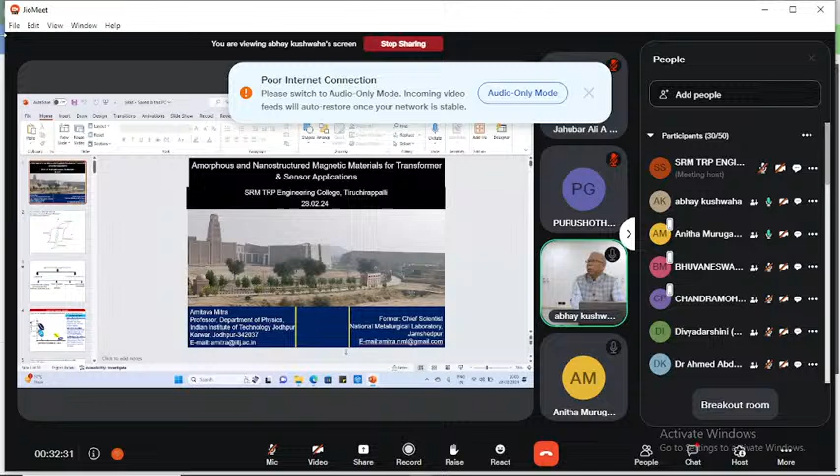Good morning to all gathered here. Good morning, sir. Sir, the slide is visible now. Can you go to full screen mode, sir? Yes, it is moving, sir. Anitha ma'am, shall we start now? Is it moving? Yes, sir, it is moving. Okay, thank you. Sir, shall we start now?

I'm ready, sir. Who won the Nobel Prize of Physics?

It was on this day in 1928 that his discovery of the Raman effect came to light at the Indian Association, to raise awareness about the importance of scientific applications in our daily lives. The theme of this year, 2024, is Indigenous Technologies for Viksit Bharat. Today, February 28, 2024, we have all gathered here to celebrate National Science Day with a small seminar with our special renowned personality, Dr.

Amitava Mitra, Professor, Department of Physics, Head, Center of R&D, Scientific Instruments, Jodhpur. Dr. Amitava Mitra completed his MSc in Physics at University of Calcutta in 1981 in the field of disordered materials. After carrying out his PhD at the Institute of Applied Magnetism with a Spanish Government Fellowship, Dr. Mitra joined CSIR, National Metallurgical Laboratory, Jamshedpur, India, in the year 1990, and developed the NDE and Magnetic Materials Group. He became Chief Scientist in 2010, and Professor of the Academy of Scientific and Innovative Research, CSIR NML. He has guided 6 PhDs and 7 MTech students for their thesis. He superannuated from CSIR NML in 2019 as Head of Research Planning and Business Development Division, and won the Best Metallurgist Award in 2006 from the Ministry of Steel, Government of India.

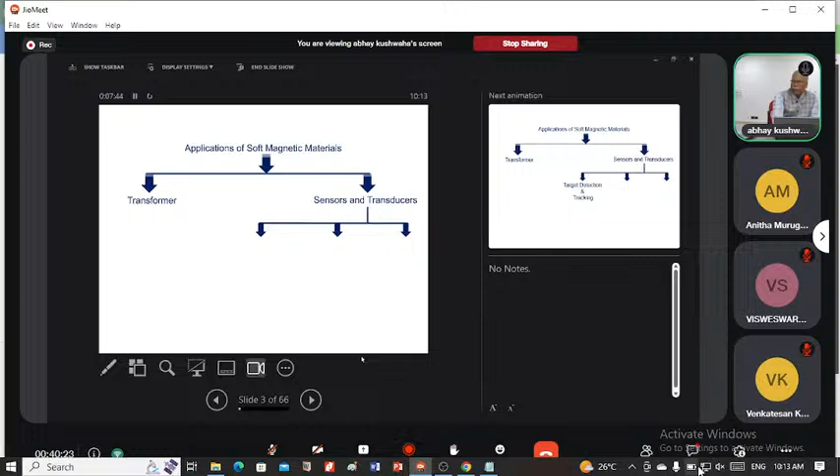What are the applications of soft magnetic materials? There are two major applications: one is transformers, and the other is sensors and transducers. Sensors and transducers also have different applications - it can be used for target detection and tracking, space research, and biomedical applications.

We work at National Metallurgical Laboratory mostly in another area, that is characterization of aging steel, instead of completely discarding a plant and going for a new one. This is a very good area of work. But one problem with this area, as we concentrate on magnetic properties, is that it is only useful for components which are steel structures. But if you see, most heavy structure is made of steel, so that is an advantage.

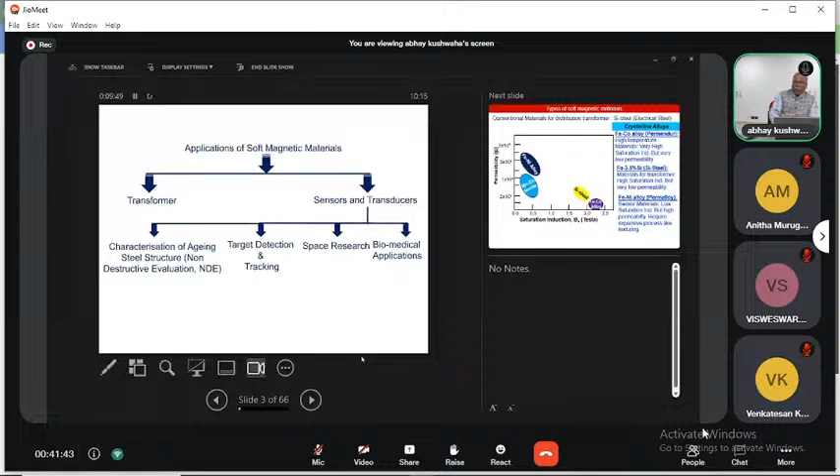Now, we will first concentrate on transformer materials, and then, if time permits, I will give an example of the material developed at the National Metallurgical Laboratory and how it can be used for pipeline inspections. As the theme of the entire proceedings is on indigenous materials, the total work we will describe is the indigenous development of materials - not only the materials, but the applications are also done indigenously.

If you consider the soft magnetic materials, these are the basic materials: iron nickel alloy, sometimes called permalloy. Another category is iron cobalt alloys, and also ferrite, manganese zinc ferrite. These are all soft magnetic materials.

These are the very conventional materials. Iron nickel alloys, called permalloy, is at the top. It has very high permeability and is used mostly in sensor elements. Iron cobalt alloys have very high saturation magnetization and are used where we require very high temperature materials, because the operating temperature is very high. Its commercial name is Permendur.

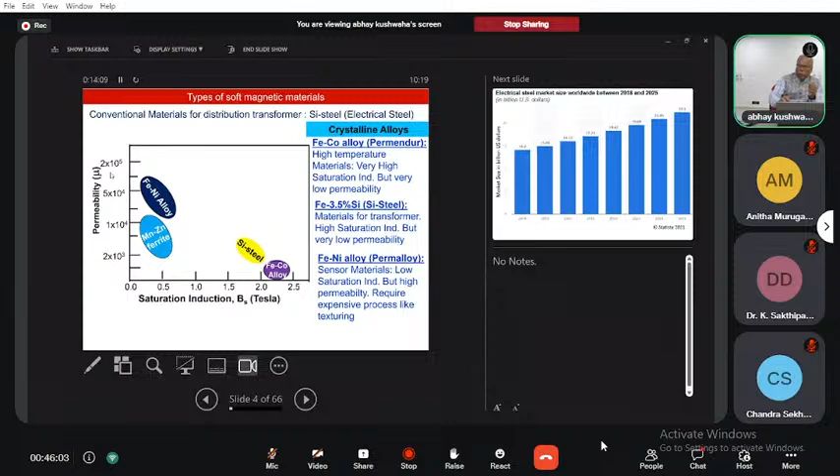Now, this silicon steel is also called electrical steel, because its major application is in transformers, where we are transferring electrical energy from one end to another. That is why it is called silicon steel and also electrical steel.

This is showing how the market of electrical steel worldwide is increasing day by day. This graph shows data from 2018 to 2025, and it basically shows how in demand these materials are.

And in fact, if we consider soft magnetic materials in total, more than 50% of this material is used for transformer cores. So the major market of soft magnetic material is as a transformer core.

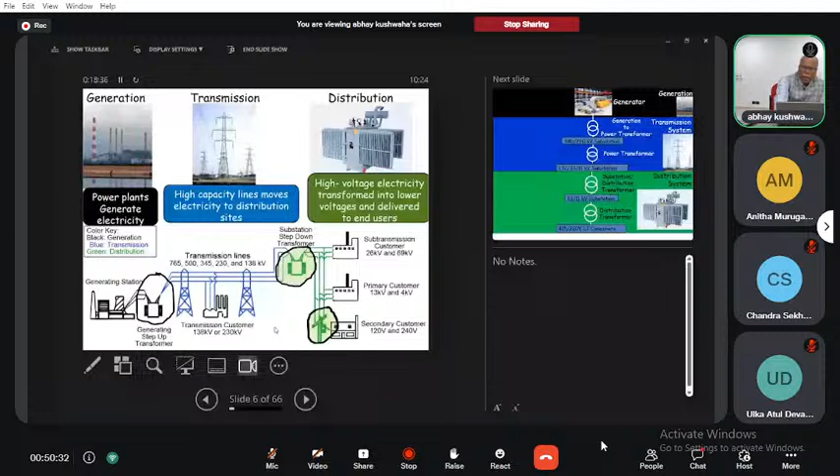And if you see this transformation process, if you prepare 100 units at the generating station, only 65 units are available for our consumption. Where do these losses take place? There is about 5% transmission loss. So when the substation receives the 95 units, many people are tapping into this line.

So the government is not getting the right type of revenue from this. But this 15 to 20%, which is the technical loss, is an opportunity for the materials scientist: how we can reduce that 15 to 20% technical loss.

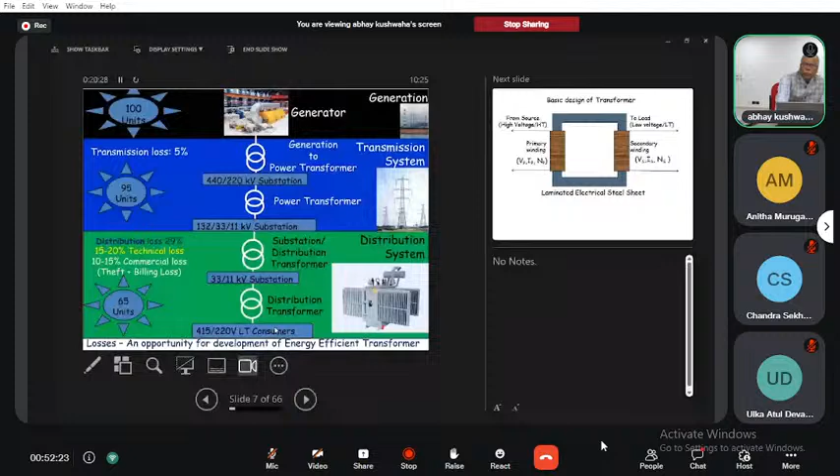This loss is basically an opportunity to develop the energy efficient transformer. If we can develop better and better materials, we can reduce this 29% losses. Now, if you see a basic design of the transformer, these rectangular portions are made of soft magnetic materials, and on the left side we have the primary coils, and on the right side the secondary coil.

The high voltage transformer, which is coming from the generating station or from the substation, goes to the household supply through the secondary windings. At the secondary windings, we put the load. When the load is connected, current flows to the secondary. When the load is not connected, nothing comes in the secondary. But at the primary end, there is always current flowing in the circuit.

So we can determine what loss is taking place. This loss is a load loss and also a no load loss.

Think about charging our mobile phone with a charger. At home, we never switch it off at the source, we just take the mobile out after charging. So our switch is on, but there is no load. At the secondary windings, no current is flowing, but in the primary winding, current continuously flows. But if we put off the switch, current will not flow in the primary windings either. So we can understand there is a load loss and a no load loss.

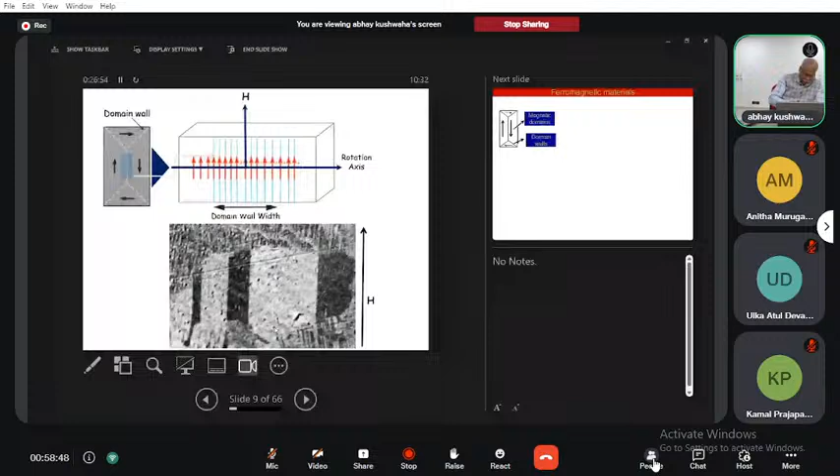The domain wall moves from one position to another, and when it reaches saturation, all the moments are oriented in one particular direction.

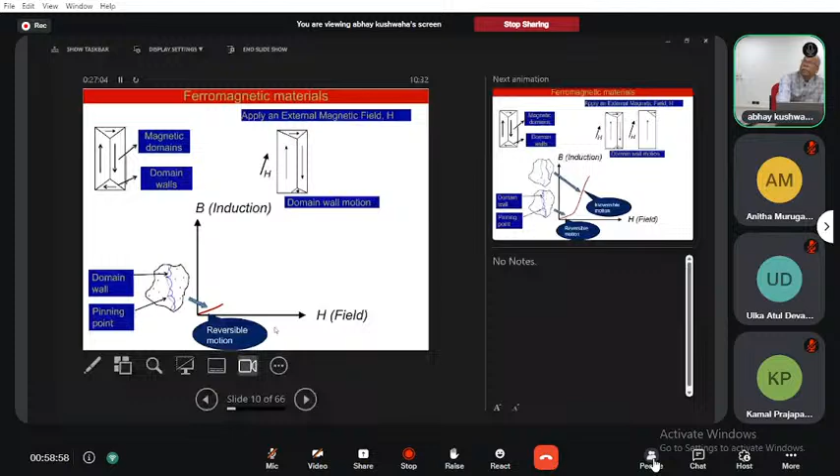If we plot magnetic field versus induction, at the initial stage we have reversible motion of the domain, then irreversible motion, then domain rotation, and we get saturation. If we go for the complete cycle, this area is called the anisotropy energy of the material.

If we go for a complete cycle, we get a hysteresis loop, and the total area under the curve is called the core loss. Our attempt should be to keep this core loss as low as possible, and also to reduce the eddy current losses.

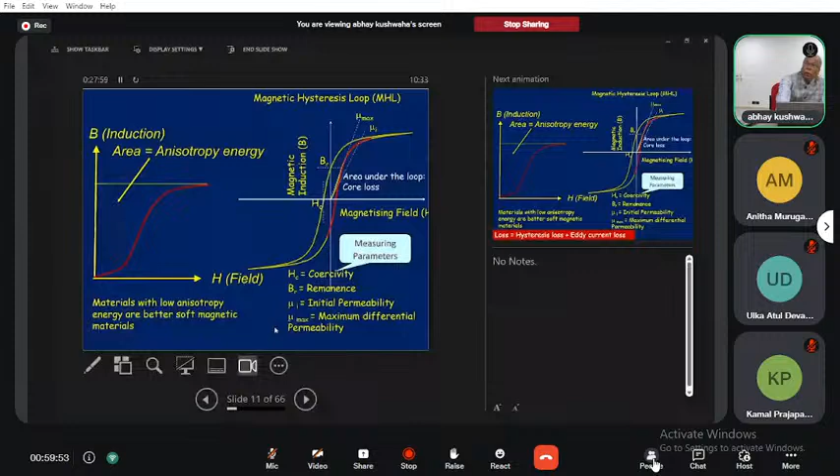So as mentioned, the losses are hysteresis loss and eddy current loss. If we consider silicon steel and go on increasing the silicon content, the total loss reduces as we increase silicon, and it becomes minimum when it is about 6.5%.

Now if we look at the resistivity measurements - why is resistivity important? Because if the material has high resistance, then the eddy current loss will be less, since the loss here is I squared R.

So if the resistance is high, then the current I will also be less. This matters because the loss varies with the square of the current magnitude, so if I is less, then the eddy current loss is also less.

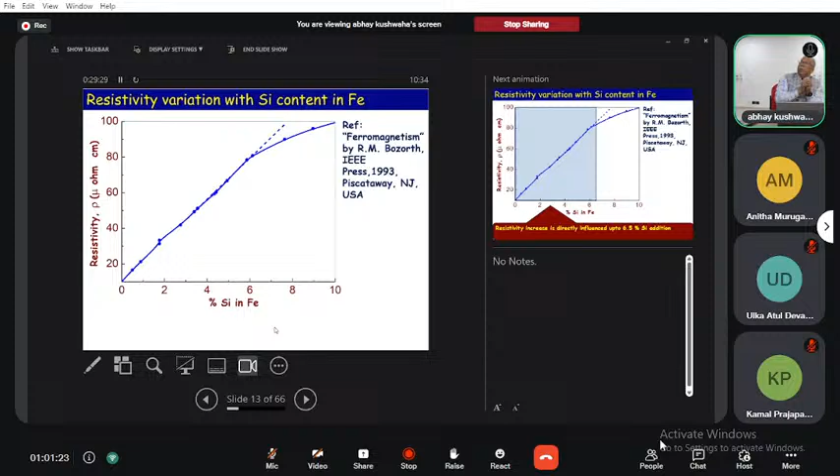But you can see it increases linearly up to around 6 to 6.5%, and after that it deviates from linearity. So you can understand that 6.5% silicon steel is a better material because its losses are less, and also the resistance is high.

When we process this material, as mentioned, the processing is the same way we prepare steel - it has to be melted, cast, and then rolled. Rolling involves two big rollers, just like sugarcane juice is prepared when the cane is pushed through two rollers. Here also, the steel in its hot condition is passed through two rollers to reduce its thickness.

So pass by pass, we reduce the thickness. But this is only possible if the material is not brittle. Let us see how this changes with silicon content.

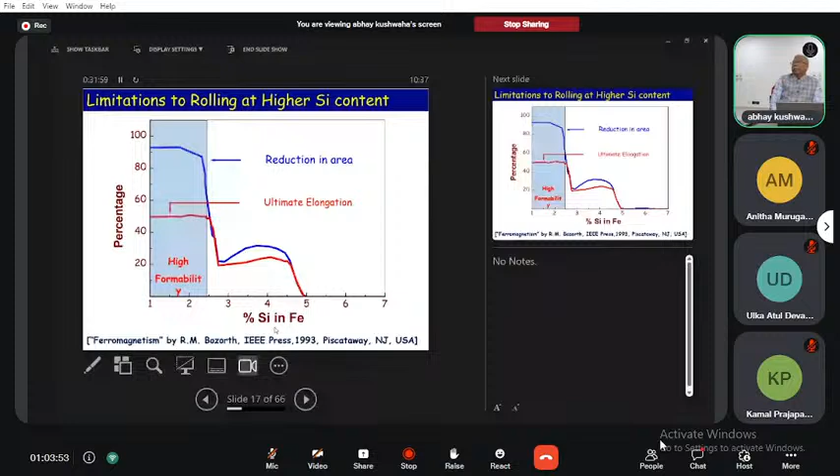If we go on increasing the silicon, we find that after 5%, it is very difficult to proceed, because the material becomes very brittle. This area cannot be rolled when silicon is greater than 5%.

So we have a small window - although 6.5% gives better magnetic properties, we cannot achieve it because of the formability problem. We cannot reduce it into thin sheets, and if we cannot make thin sheets, we cannot put it in laminated form. If we cannot put it in laminated form, eddy current will be very high, and handling also becomes very difficult. So we have a very small window to work with for these materials.

Now, another thing observed is related to grain size. If we plot grain size against the coercivity of this material, we see that for higher and higher grain size, the coercivity becomes as low as possible. There is a region called the single domain size, where coercivity is as high as possible.

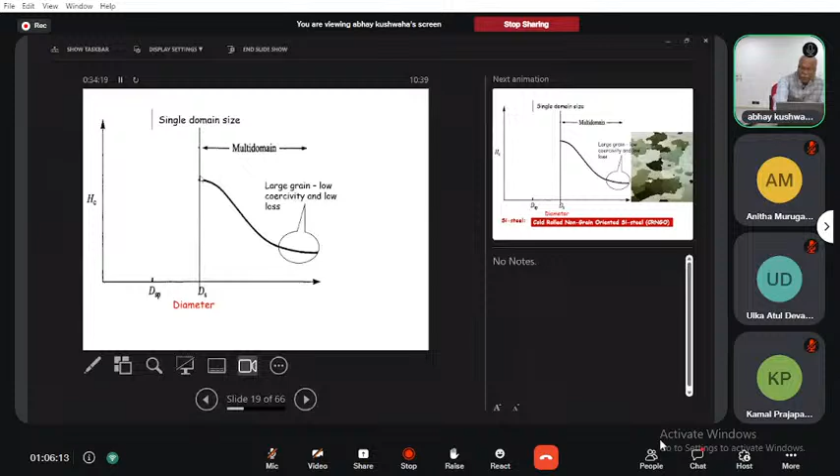So we have now a large domain size, a large grain, low coercivity, and low losses. And if we see this silicon steel, if we go for around 3.5% silicon, we can get a grain size which is quite high. This is called cold rolled non-grain oriented silicon steel.

So now we come to silicon steel with 3.5% silicon, not 6.5%. We have a variety called cold rolled, non-grain oriented silicon steel, and another variety called cold roll, grain oriented, where you can see the grains are oriented along one direction. So we have two types: cold roll non-grain oriented, and cold roll grain oriented.

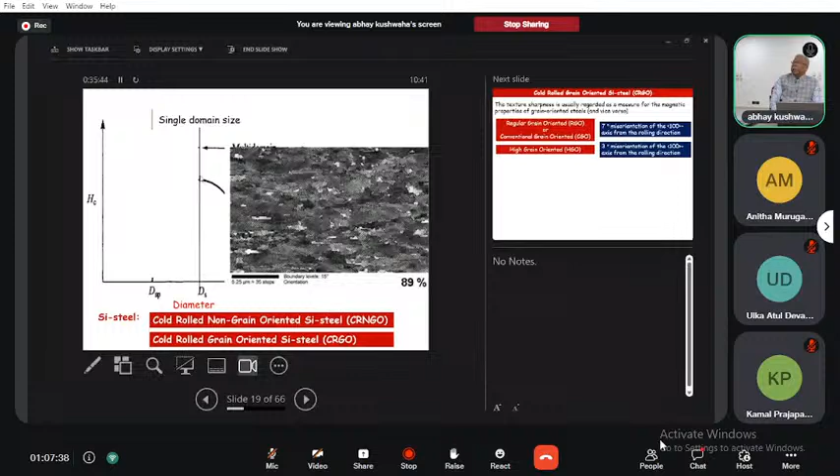In fact, in India, cold rolled grain oriented silicon steel is still not commercially produced. Some effort is going on at Jindal Steel to prepare this CRGO. But CRNGO is produced by many steel industries.

Out of CRGO, which is the better variety, there are again two types of silicon steel. One is called regular grain oriented, where the orientation and the easy axis have 7-degree misorientation, and another is high grain oriented steel, HGO, where 3-degree misorientation from the rolling direction takes place. So I am not able to orient all the field along the rolling direction or along the easy axis.

So if we consider the losses for regular grain oriented and high grain oriented steel: for regular grain oriented this loss is about 0.6 watts per kg, and for HGO it comes down close to 0.55 watts per kg. You can see the various varieties of materials and various types of losses: hysteresis loss, classical eddy current loss, and excess eddy current loss.

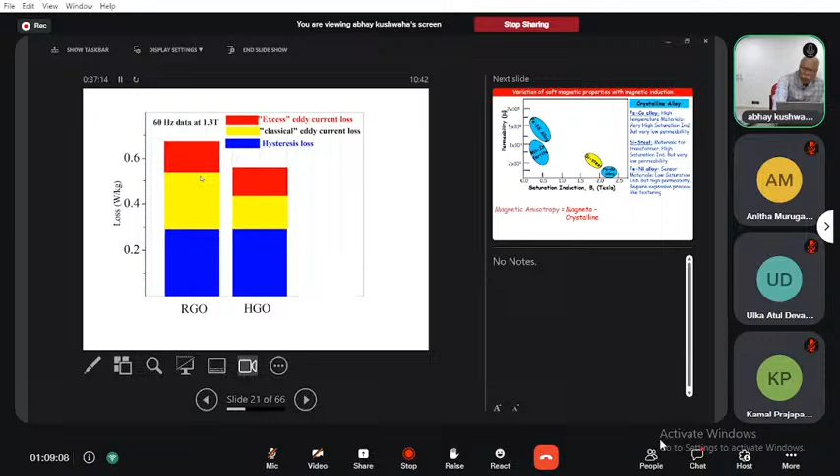Now if we consider the magnetic anisotropy of this material, as these are basically crystalline, polycrystalline materials, the major anisotropy comes from magnetocrystalline origin because of the crystal orientations. We have another called magnetoelastic anisotropy, which comes because of the magnetostriction constant of the material, and another type of anisotropy.

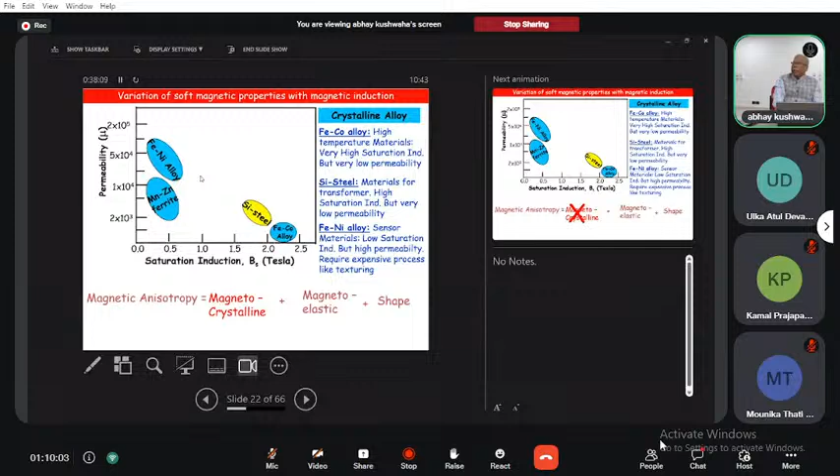If we consider the major anisotropy coming from magnetocrystalline anisotropy, and if we can eliminate it, then I can reduce the anisotropy energy of the material drastically. And as the anisotropy reduces drastically, I can also reduce the hysteresis loss drastically. So our effort will be how we can reduce this magnetocrystalline anisotropy, which arises because of the crystal structure.

Now, how does the crystal structure come about? If we melt a material and give sufficient time during cooling so that an equilibrium structure forms, crystalline structure is a very equilibrium structure, and we get a crystalline structure.

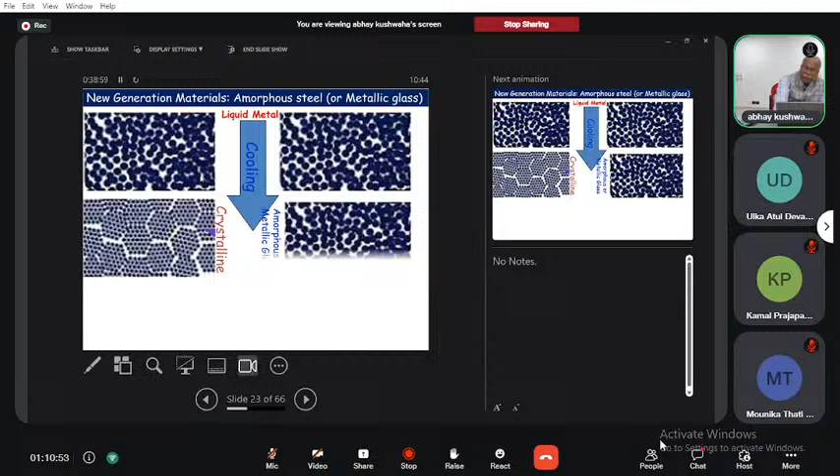But instead of giving sufficient time, if we quench the material from the liquid state to the solid state while retaining the liquid structure as it is, then I can eliminate the magnetocrystalline anisotropy of that material. This is the basic philosophy behind going for amorphous material. We go for amorphous material, amorphous steel, or metallic glass, whatever you call it, because it has a glassy structure and does not have any crystalline anisotropy.

So how can we do it? We can do it by rapid solidification. What is the process of rapid solidification? You have a copper wheel, and you rotate this copper wheel, and the liquid metal is poured onto it. We get the material as a form of strip, a very thin strip, around 30 microns thick, in the form of a thin ribbon. This facility has the capacity to produce 1 kilogram of material, and it was developed at the National Metallurgical Laboratory for development of these things.

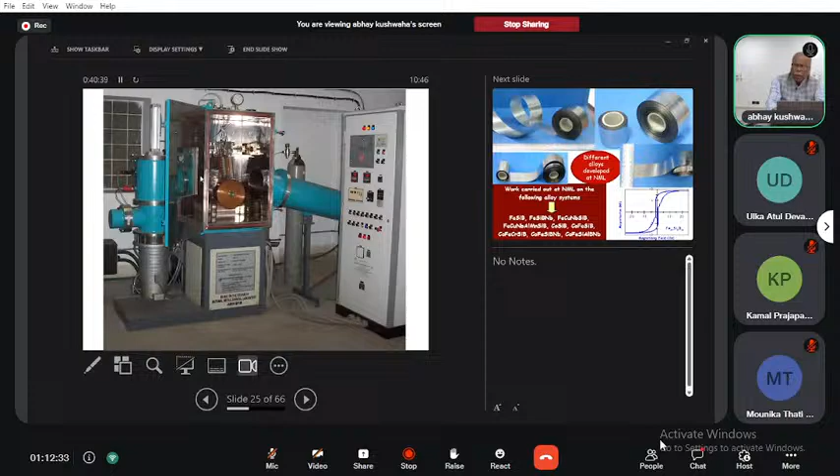Let us see whether I can show you a video where you can understand what process is taking place. Just let me see whether I can get it, because there is a problem. Let us see whether I can show you how to go. Just give me a moment. Share. Share screen. Entire screen.

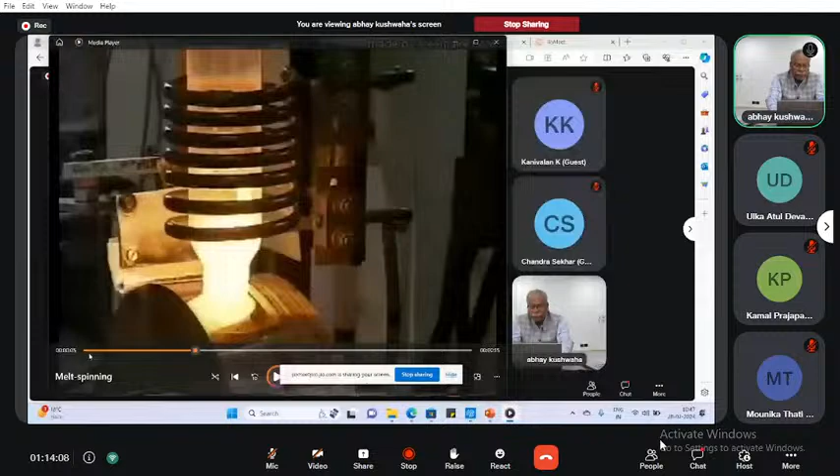Are you able to see that video? No. Are you able to see it? Yes, sir. Yes.

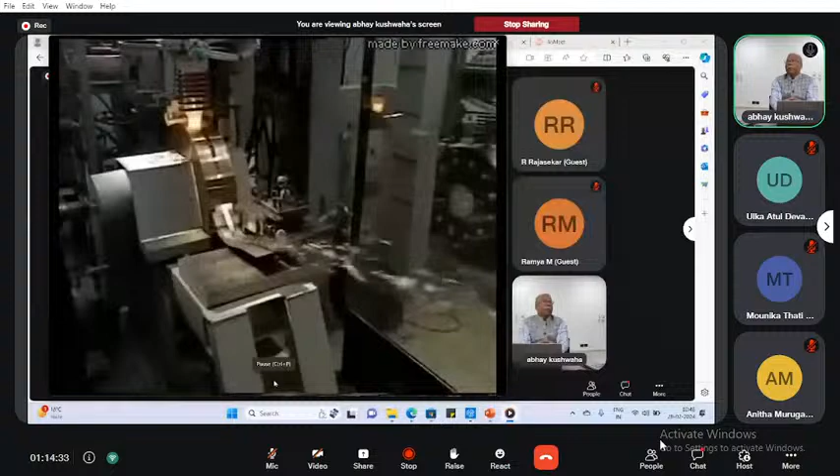You see, this liquid metal is now pouring on that wheel, and we are getting a continuous ribbon. Let me just do it once more. So you can have that ribbon in that form.

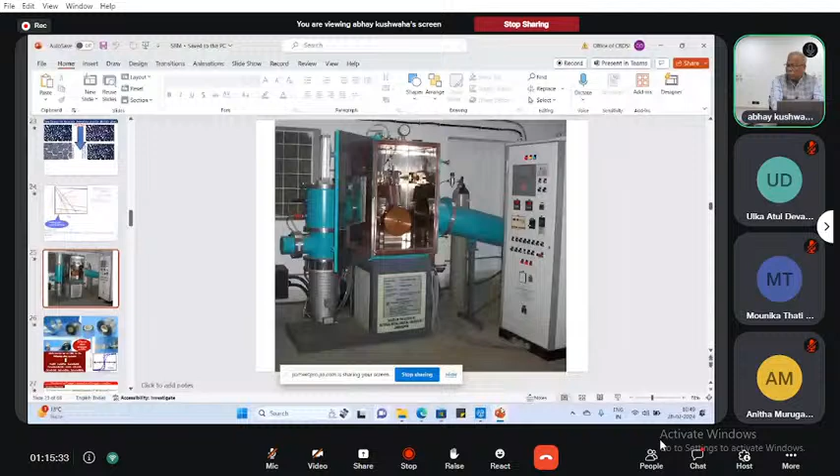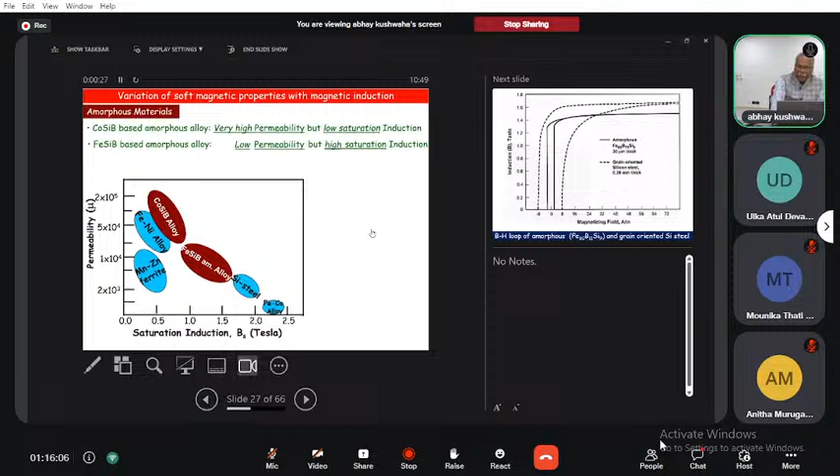Iron, silicon, boron - these are the type of materials. Now if we compare this material with the hysteresis loop of silicon steel, you can easily see that amorphous iron, boron, and silicon has a very narrow loop as compared to the grain-oriented silicon steel. So there is a huge reduction in the hysteresis loss, and at the same time, because of the amorphous structure, the resistivity of this material is quite high as compared to the crystalline structures.

Now if we compare this material to the regular grain-oriented and highly grain-oriented steel, with the amorphous alloy or metallic glass, the loss for highly grain-oriented steel, which comes around 0.55 watts per kg, is reduced to less than 0.2 watts per kg. You can understand how much reduction there is in the hysteresis loss, and in the eddy current loss, both excess and classical eddy current loss.

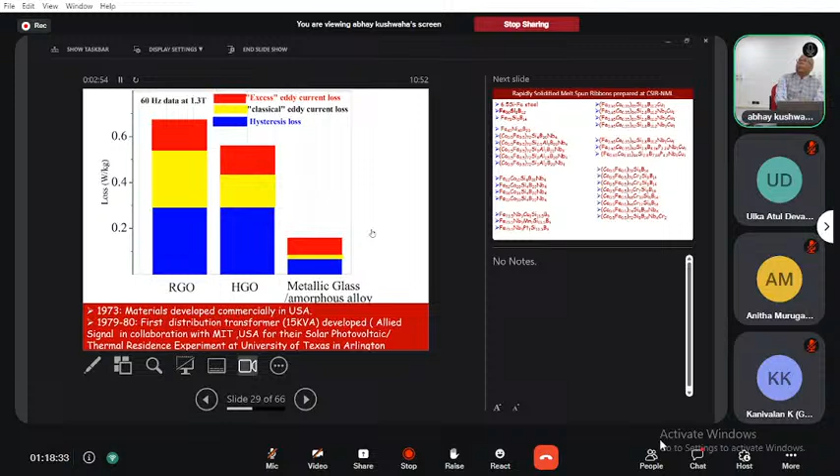And there is a large number of alloys which were developed at the National Metallurgical Laboratory. And you see, these are the various transformers.

Basically, industries have already developed in India who are producing this material commercially. In fact, just at Haryana, there was a company coming up called Advanced Materials - its name is probably Advanced Magnetic Materials.

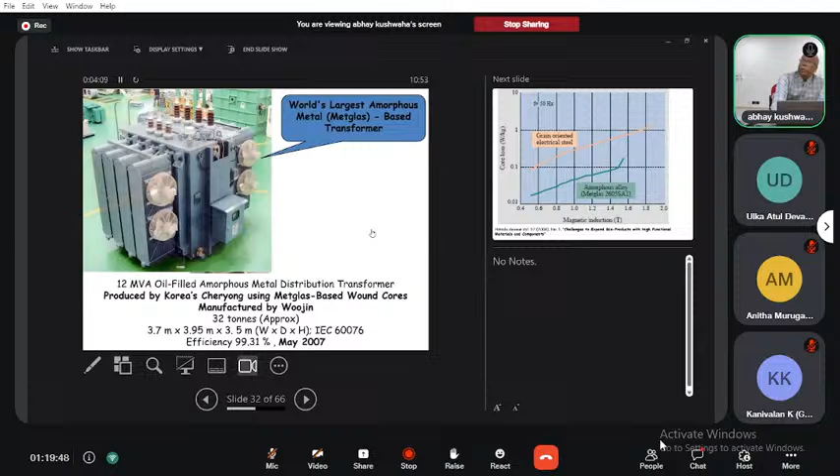They are developing their industry in consultation with the National Metallurgical Laboratories. But these are examples which were initiated at the USA, and these are the world's biggest 12 megavolt ampere oil-filled amorphous metal transformers, which were used in Korea.

But you see, all the aspects you cannot get in one material, so it has a disadvantage also. The major disadvantage is because lots of boron and silicon are present here, its saturation induction is really much less as compared to 3.5% silicon steel.

And that is why, for applications where you require a very high magnetic induction level, this material is not very good. Otherwise, you can see how much reduction there is in core loss. But as soon as it goes beyond 1.5, which is probably a useful magnetic induction level for this type of material, we can understand it will be very difficult if we want to go beyond 1.4, so this material is not advisable for such applications.

Now if we look at the applications of these materials, as a transformer material, soft magnetic materials market share for transformers is 55.9%. Next is the shielding materials, and the rest are different types of sensors and developments.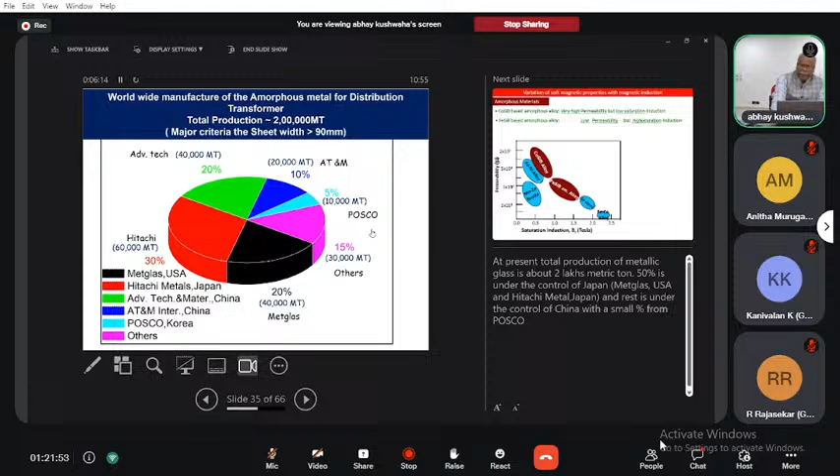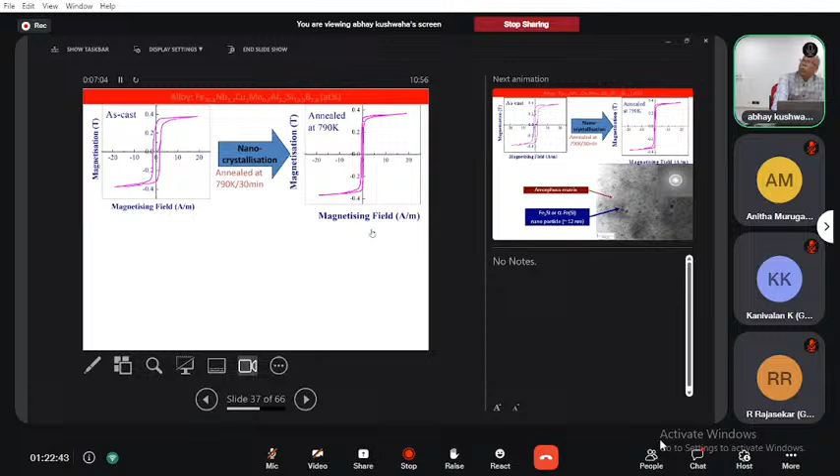If you go one more step, there is enough space available for the development of newer materials, and we are considering nanostructured materials. This is the material as-cast, and after that, if we go for proper heat treatment, we get a material called nanostructured magnetic materials, and this can be produced in large quantity - the same system that is used for producing this amorphous alloy in large quantity.

Now you add niobium and copper to it. Niobium is added so that the grain size cannot increase, and copper is added as a nucleation site, and then we can have an amorphous matrix with nanoparticles dispersed in it, and this leads to a coercivity much lower than what we got in the amorphous system.

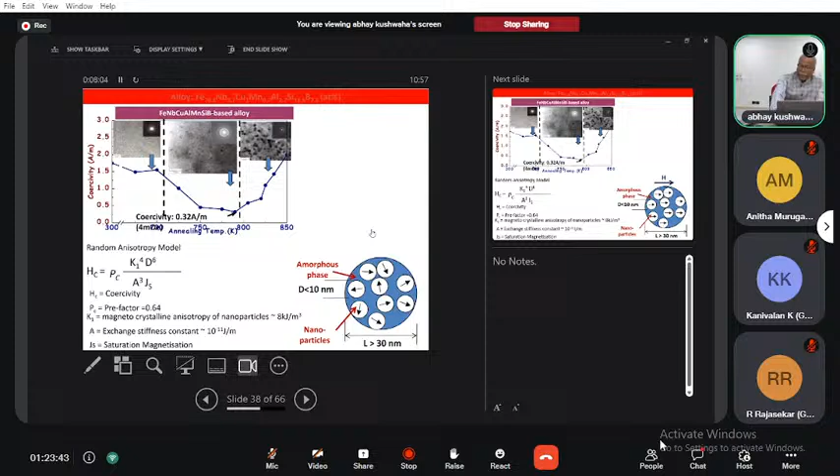Here you can see the coercivity reduces with d to the power 6. So here, within one domain wall width, you have a large number of nanoparticles, and by application of a small field you can see the domains rotate along the magnetic field. This process takes place in such a small field that coercivity becomes very low.

This is also used for development of different small transformers, and its application is in sensors, different types of sensors, because its coercivity is extremely low. Coercivity being extremely low indicates that its permeability is extremely high.

How much time do I have? Hello? Do you have another 5 minutes, 5 to 10 minutes?

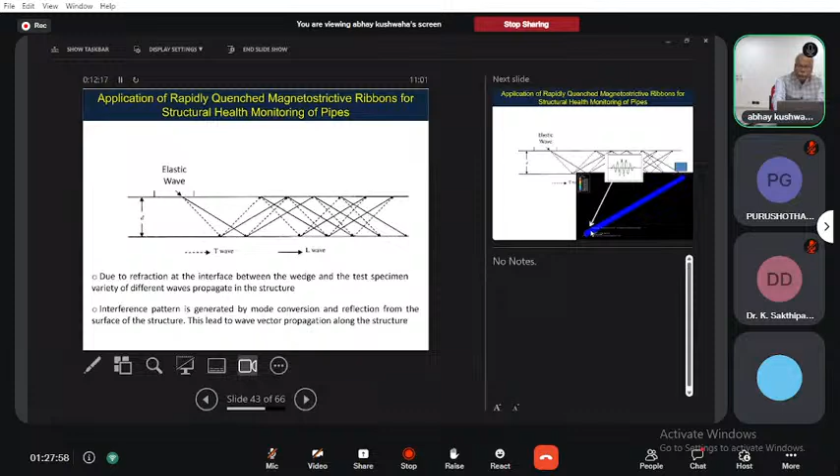So what is happening? If we make a wave at one end, this wave will move throughout this pipe and come back from the end, and again this excursion is taking place.

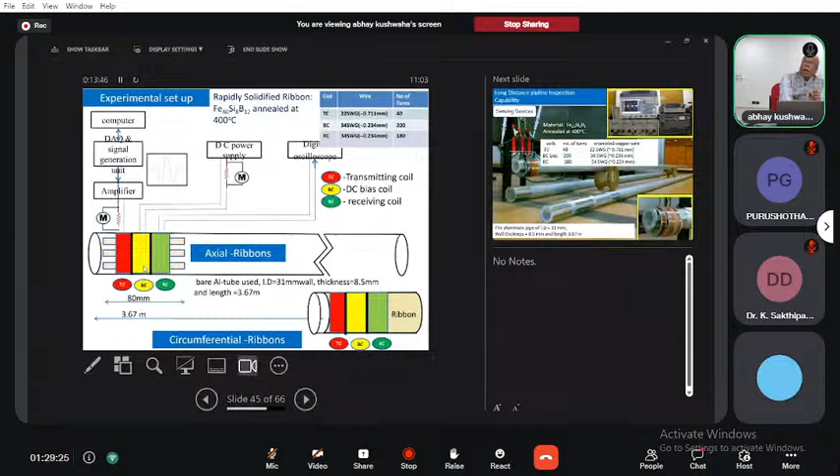This is what I call a coil. We have a coil - transmission coil, receiving coil - and also a coil which we use to produce a DC magnetic field.

This is the exact setup, and this is also equipment which was developed at the National Metallurgical Laboratory. You see, this is a type of signal which we call first back wall, second back wall, third back wall, and so on.

Now, if we have a cut here, you can find that in between the two signals, we have a signal. This is a cut, and this is where we have simulated the corrosion. So we have the signal here - one is the cut, one is the corrosion.

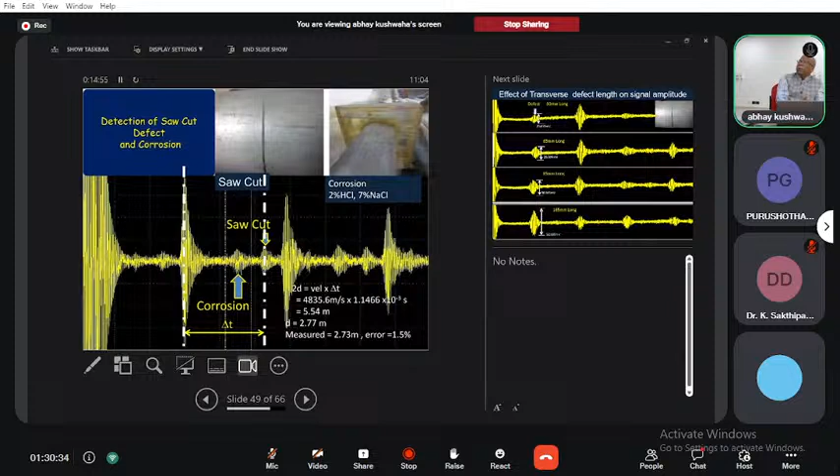So if we now know the velocity of the wave which is propagating along the tube, and from knowing the velocity and the time we are getting this signal, I can understand which location. This shows how much the signal is there.

This shows that even if the line is underground, we can also measure the signals, and if there is a hole, we also can detect the signal. So these are the applications. I am not going into any details of this other activity.

There are a lot of persons involved in this work, and I had a lot of students from NIT Trichy who did their MTech with me when I was at National Metallurgical Laboratory, along with scientists and PhD students. And this device is now commercially available in the market for use in the petrochemical industries.

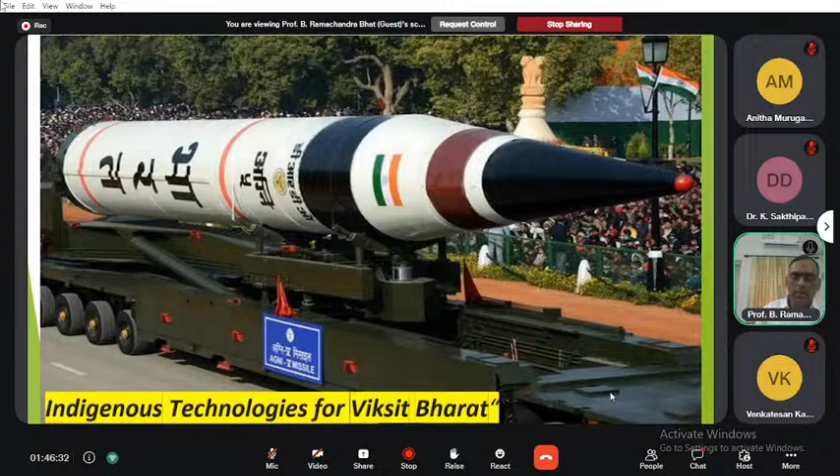This is an intercontinental ballistic missile reference, which we realized is not quite the right term, but otherwise, it's like a nano car, it is highly spacious and convenient. Now, what do you mean by nanoparticle?

Nanoparticle - this is a basic question someone might ask, and this will be the response. In general, we say that it is a particle with size in any one spatial direction within 1 to 100 nanometers. But the perfect definition is different: particles with size in any one spatial direction within 1 to 100 nanometers, with their property being markedly different from that of the bulk material. This is highly important, because when the size decreases, the property changes, and that is called nanoparticles.

You can see that all of you are physicists probably, and you know the famous tagline: 'there's plenty of room at the bottom.' In 1959, Richard P. Feynman said, 'there's plenty of room at the bottom.' That means you can go down in the size of the material, and definitely you will have a lot of physics, chemistry, or biology to explore - a whole science to explore.

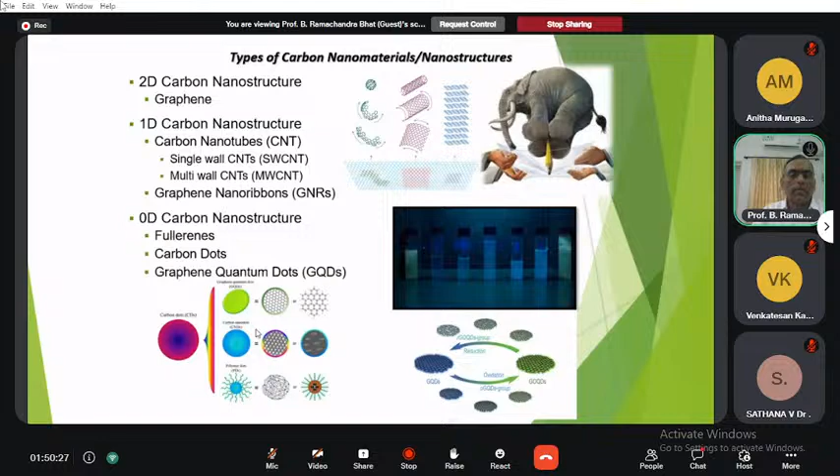Another material is the graphene quantum dot. It also comes under zero-dimensional carbon nanostructures.

So at the conference on nanotechnology, the organizer called an expert in nanotechnology, and he introduced the conference audience to the two one-dimensional carbon nanostructures, that is carbon nanotubes and nanofibers.

The carbon nanotube, CNT, is described as a seamless cylinder made by rolling one or several layers of graphite sheets into a tubular structure. So this graphite sheet rolls up to give carbon nanotubes. We have different types of carbon nanotubes: single wall carbon nanotube and multi-wall carbon nanotube.

Coming to nanofibers, they are also another type of arrangement of the same graphite sheet, but in a different arrangement.

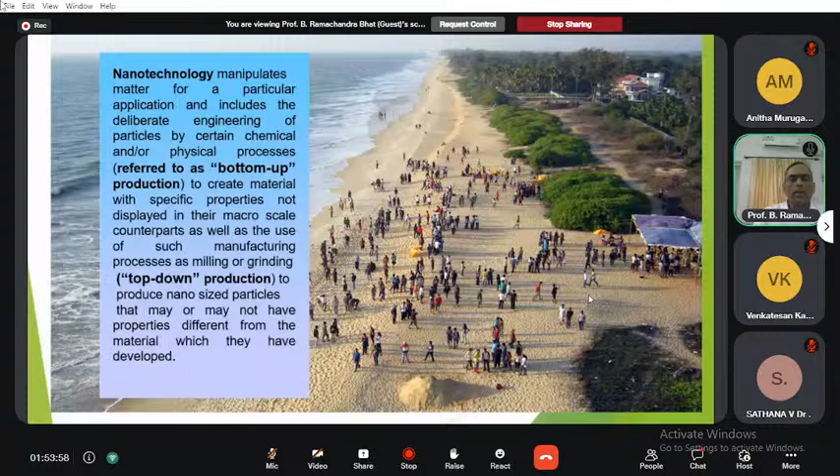Nanotechnology manipulates matter for particular applications. For example, a professor asked newly joined research scholars to prepare nano materials for the synthesis of carbon nanostructures. There are three major methods: the arc discharge method, laser ablation method, and chemical vapor deposition method.

Out of these, bulk scale synthesis is done using the chemical vapor deposition method, and this is more advantageous because you can achieve bulk scale preparation, it's versatile, and economically it's the best method because it costs very little.

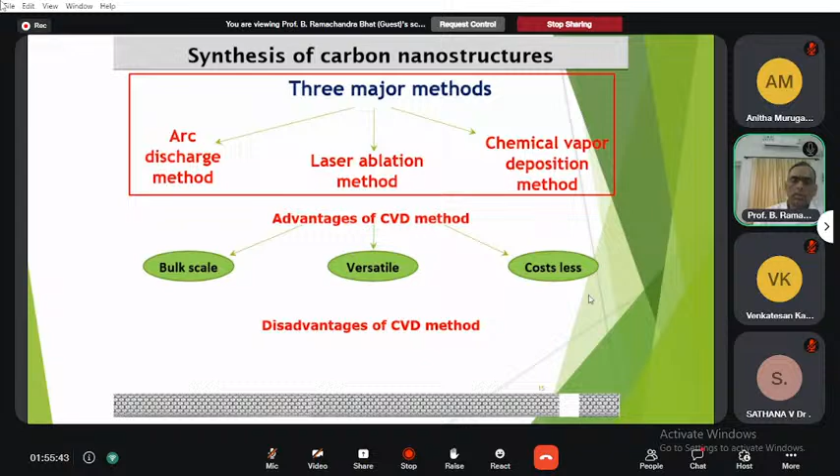But the disadvantage with the chemical vapor deposition, the CVD method... Like 'Iron Man' - normally we say if something is very hard and sturdy, we call it like Iron Man. Compared to this, what is the property of carbon nano materials?

Carbon nanomaterial is the strongest material ever known. The Young's modulus of carbon nanotube is 1250 gigapascal, compared to high strength steel, which is just 200 gigapascal. The tensile strength is 11 to 63 gigapascal, compared to steel's 2 gigapascal. The density, compared to aluminum, is half of that, and that's why it is a highly light material.

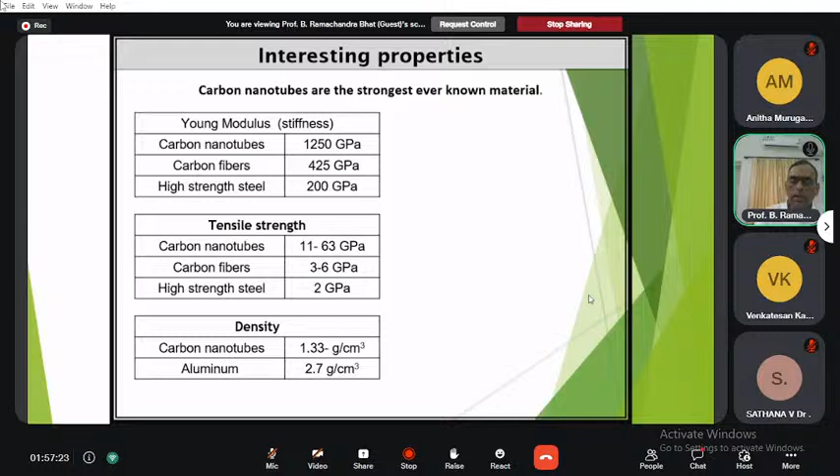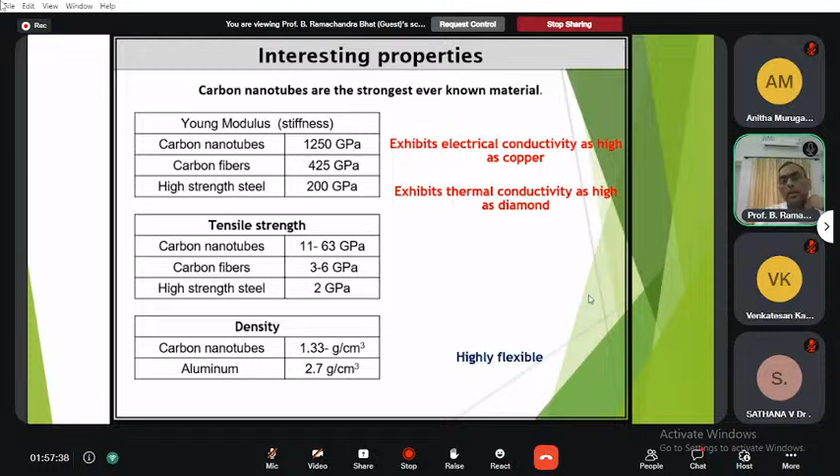Most of the time, carbon nanotubes find application in lightweight vehicles, lightweight materials, and lightweight rackets. Tennis rackets or badminton rackets are made from this material because it's highly light as well as very strong. It exhibits electrical conductivity as high as copper, and thermal conductivity as high as diamond. Moreover, the highly interesting part of this material is that it is highly flexible.

The first man to report carbon nanotubes is Sumio Iijima from NEC Corporation, Japan. He reported the synthesis of carbon nanotubes in Nature in 1991. That was a multi-wall carbon nanotube.

Coming to the history of the carbon nanotube, as I said, Sumio Iijima reported the multi-wall carbon nanotube in 1991, and in 1993 he again reported carbon nanotubes synthesized through the arc discharge method, this time a single-wall carbon nanotube.

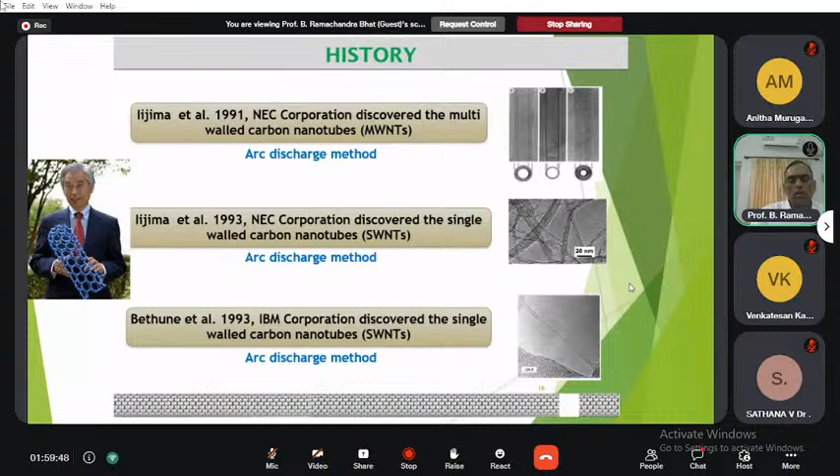This is the instrumental setup required for the synthesis of carbon nanotubes, where this is a two furnace system. Sometimes only one furnace is used. These two cylinders supply gas - one is the argon cylinder, another is the acetylene or hydrocarbon cylinder to supply the precursor. You have a quartz boat here, kept inside the quartz tube.

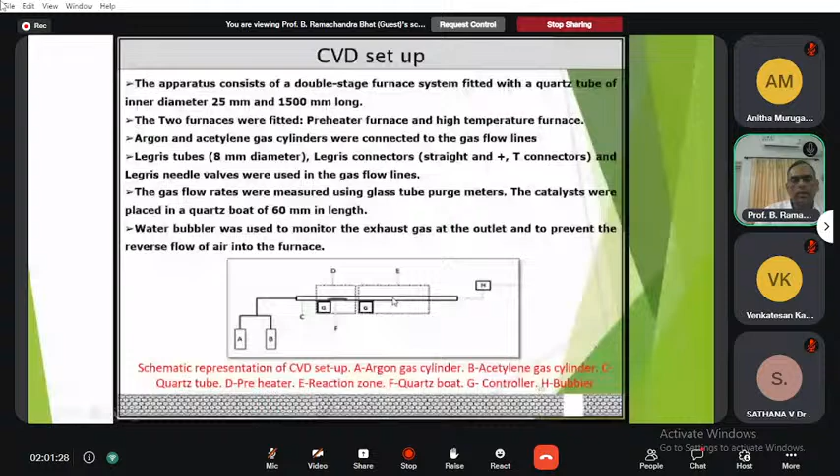This preheater is placed on the boat, and the nanomaterials are formed, and thus the formed nanomaterial moves to the other furnace, the reaction zone of the quartz tube. This is exactly where the carbon nanotube grows.

In this case, we use hydrocarbons, and when the hydrocarbon vapor comes in contact with the hot metal nanoparticle, it first decomposes into carbon and hydrogen species. The hydrogen flies away, and carbon gets dissolved into the metal. After reaching the carbon solubility limit in the metal at that temperature, the dissolved carbon precipitates out and crystallizes.

It forms a cylindrical network, as you can see here, having no dangling bonds, hence energetically it is very stable. This hydrocarbon decomposition releases some heat to the metal's exposed zone, while the carbon crystallization absorbs some heat from the metal's precipitation zone. So this precise thermal gradient inside the metal particle keeps the process going.

Now we have two different mechanisms proposed here. One is the root growth method. In the root growth method, the catalyst is on the substrate - you can see here a nanometal particle placed on a substrate, across the metal bottom. Now the CNT precipitation tries to push.

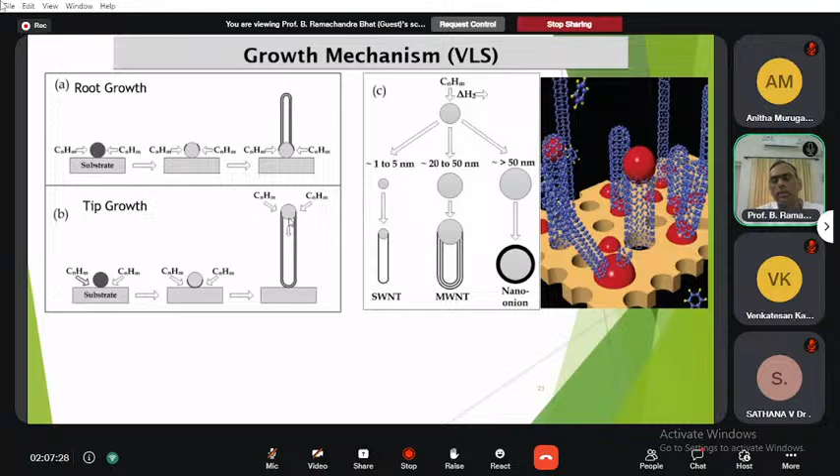Now synthesizing the carbon nanotube using a different catalyst. We have discovered a few metal formates for the synthesis of carbon nanotubes on calcium carbonate as a support. These metal formates like nickel and cobalt formate, cobalt and iron formate, and nickel and iron formate.

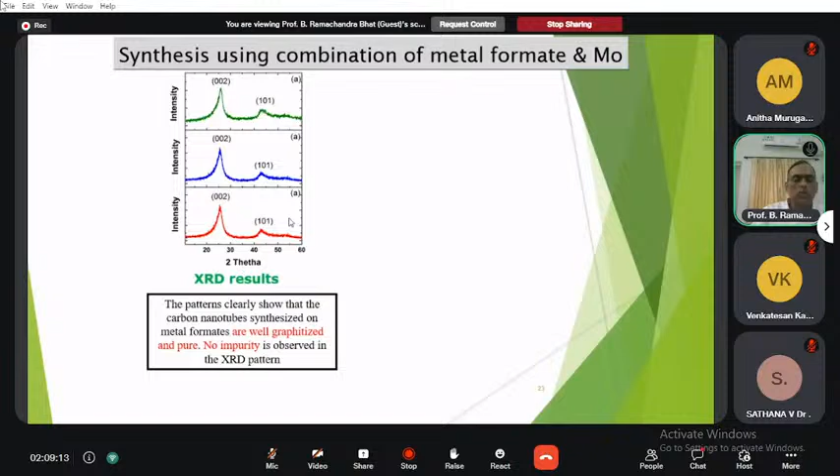Now we can analyze this. It is explained in these two mechanisms. The number of nanotubes is determined by the efficiency of the nucleation stage, which is the first stage where the number of nanotubes are formed. This nucleation stage is favored by cobalt at a higher rate compared to platinum. Platinum is greater than nickel, nickel greater than copper. So cobalt takes the upper hand in this case.

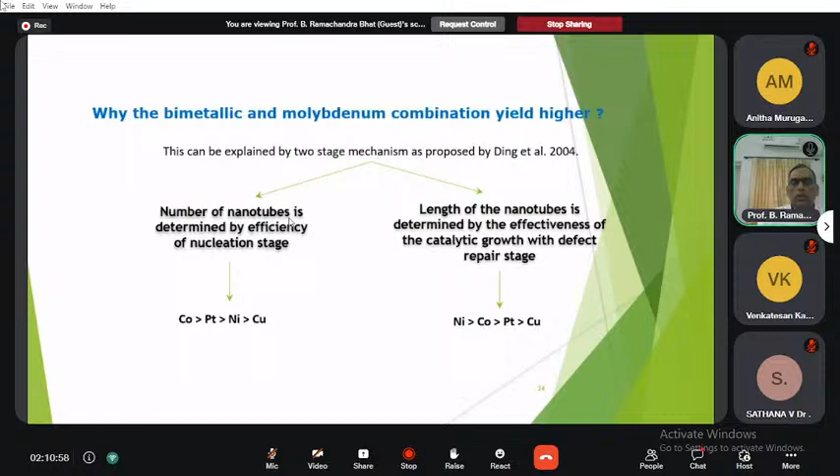The formates or metal acetates are taken, and we have changed to sodium chloride as a support from calcium carbonate. These are some images of the material we synthesized. It is a carbon nanofiber, and the TEM image clearly shows there is no hollow core in the material, which shows that it is a CNF.

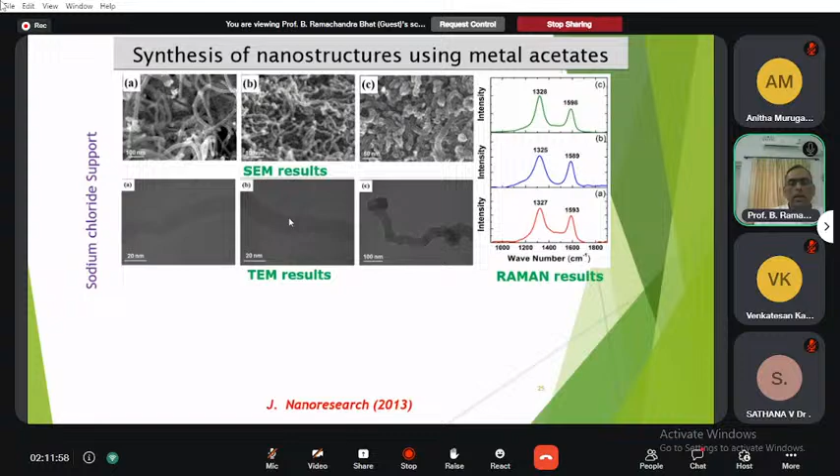This is Raman with nickel cobalt formate, cobalt formate, cobalt and iron formate, and iron and nickel formate, where the ID by IG ratio is just below 1. You can see that the materials are well prepared, the CNFs are formed, and the combination gives a very good result here. The purity is also more than 98%.

Now, the catalyst we have taken, the advantage of this catalyst is that it's a metal formate, either acetate or oxalate. The advantage here is it directly gives nanoparticles. You can see the reactions here: nickel oxalate, or nickel cobalt, or iron oxalate, where on heating, the nickel or iron or cobalt nanoparticles are obtained, and the other gaseous species that are obtained easily escape out. No impurities remain. This can be achieved at a lower temperature also.

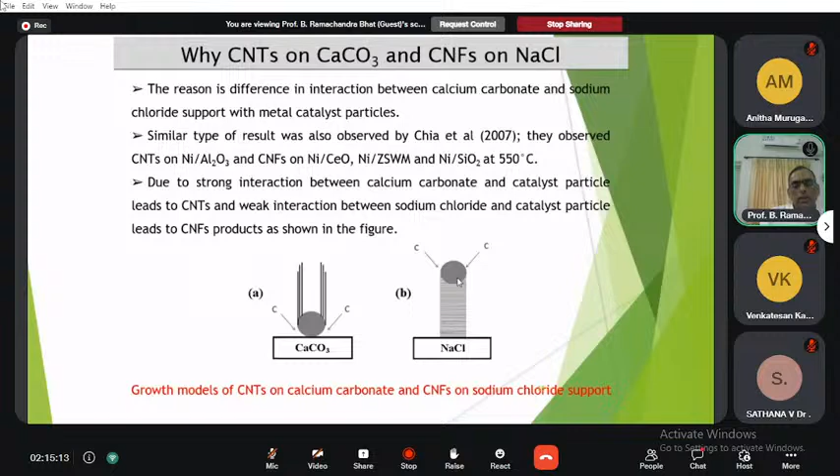Now coming to sodium chloride and the metal nanoparticle, this interaction is very weak, and the carbon precipitate can take away this metal, forming fibers. So this is the growth model for the CNT as well as the CNF on the calcium carbonate and sodium chloride substrates.

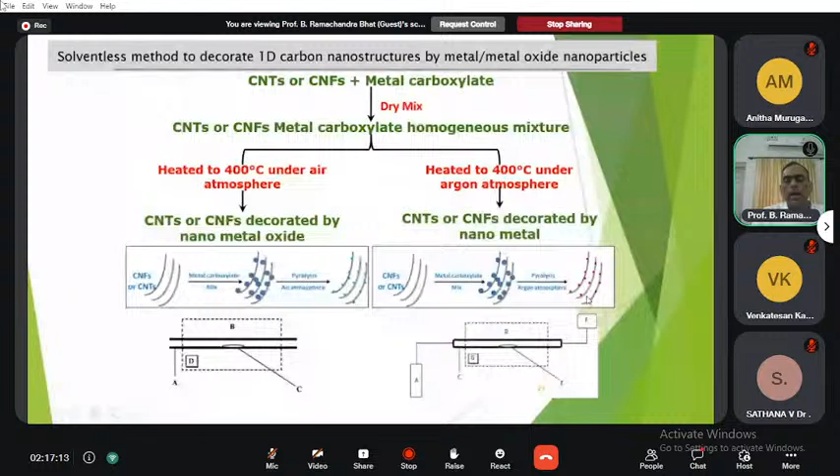Without using any solvent, and this is reported for the first time: CNT or CNF is taken and treated with the metal carboxylate. It's a dry mixture, mixed well, and the CNT or CNF metal carboxylate homogeneous mixture is formed, then heated to 400 degrees under air atmosphere. The CNT or CNF gets decorated by nano metal oxides. On mixing and heating around 400 degrees Celsius on pyrolysis under air atmosphere, the metal oxide is decorated on the CNT or CNF. But if you heat around 400 degrees Celsius under argon or inert atmosphere, only the metal particles or metal nanoparticles get decorated.

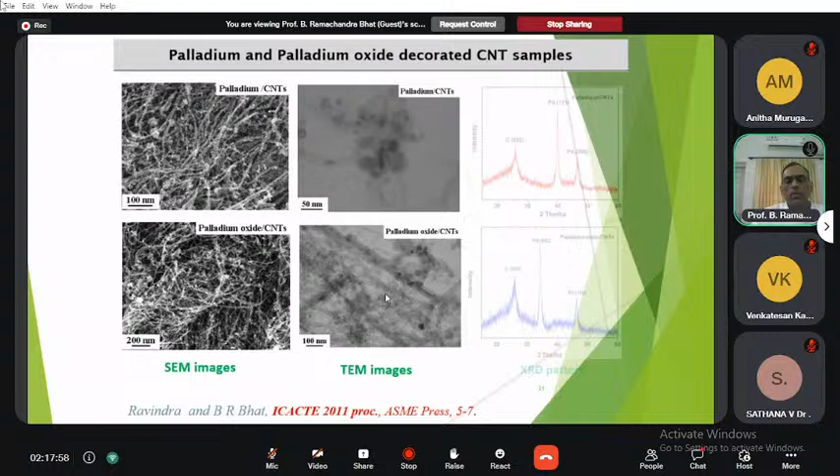Now this is palladium and palladium oxide decoration on CNT. You can see the TEM images where the palladium metal is decorated on carbon nanotubes, and the palladium oxide is decorated on carbon nanotubes.

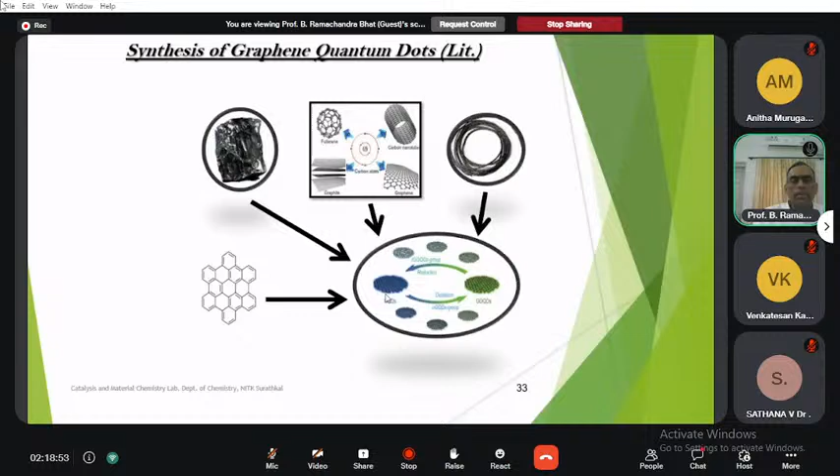Now coming to the zero-dimensional material, that is the graphene quantum dots. The graphene quantum dots can be prepared from many materials like graphite, chemicals, graphene, fullerenes, and carbon nanotubes - all these can be used. The synthesis method, as you know, is a top-down method: hydrothermal and solvothermal cutting, electrochemical route, nanolithography, nanotomy exfoliation, ultrasonic shearing, and oxidative cutting are other approaches for quantum dot synthesis.

Coming to the bottom-up method, it's a self-assembly, where taking HBC you can get the graphene quantum dots. Organic synthesis, a synthetic approach, is also one method to synthesize graphene quantum dots. And the other way is a cage opening of fullerene - when you open a fullerene, you get pieces, which is nothing but a sheet-like material, and pieces of this sheet are the graphene quantum dots.

Coming to the synthesis of graphene quantum dots through the hydrothermal method: taking graphite, potassium permanganate, sulfuric acid and phosphoric acid - it's an improved Hummers method for the synthesis of graphene, and then hydrothermal cutting is possible. They have graphene oxide with basic pH, which is cut into smaller pieces. Graphene form is cut into smaller pieces, and this is nothing but graphene quantum dots.

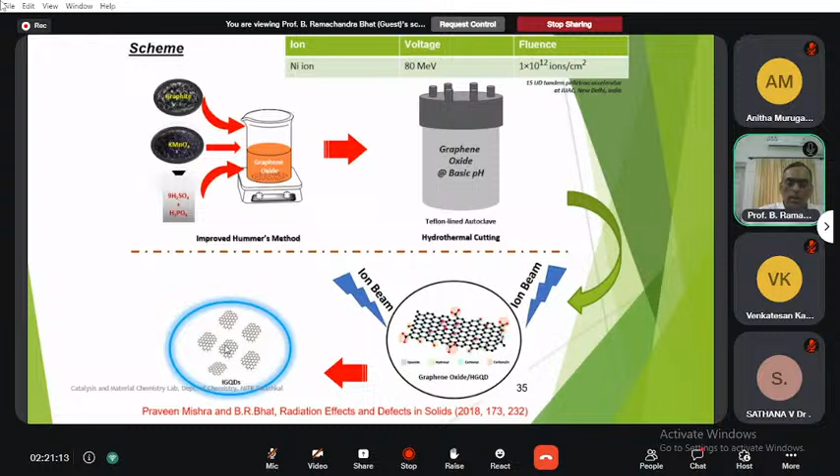This graphene quantum dots can also be obtained by ion beam irradiation. You get graphene oxide here, and graphene oxide on ion beam irradiation can be cut into smaller pieces, and thus the ion beam irradiated graphene quantum dots are obtained - this we have reported in Radiation Effects and Defects in Solids.

Nanotechnology matters because familiar materials begin to develop odd properties when they are of nano size. As the size goes to a nano level, even yellow gold behaves like a red material. So likewise, if you tear a piece of aluminum into tiny strips, it will still behave like aluminum.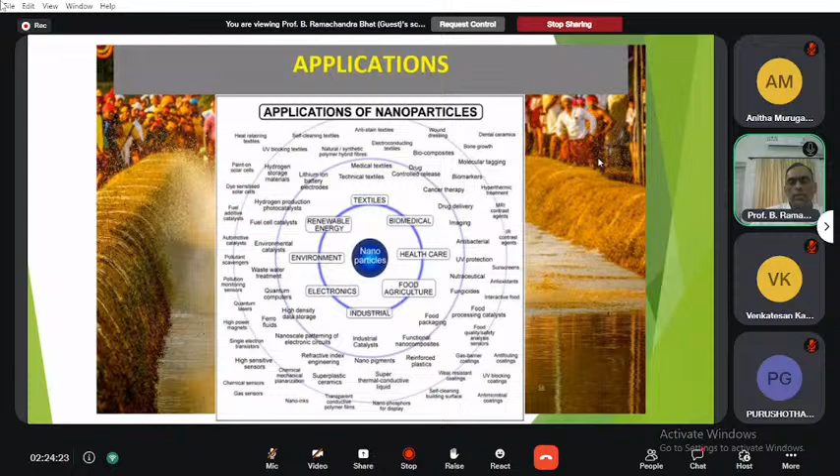This slide lists a number of applications. The major ones are textile, biomedical, healthcare, food, agriculture, industrial, electronics, environment, renewable energy, spaceships or aircrafts, and automobile bodies are made through this material.

And coming to finer material, where the devices, energy storage batteries, and it is used as a material for biosensors, scanning probe tips, and transistors and all.

You can see that nano batteries are for the future. Consider how the size of the mobile phone has changed since it was introduced. Of course, the size increased because we wanted a bigger screen, so the increase in mobile size was due to the demand for bigger screens. But with nano devices, it's quite normal that you need an energy source in nano size as well.

In this slide, you can see a professor working on nanomaterials going for a ride along with his student. His wife called him but the mobile wasn't working, and she knew the research scholar would be with the professor, so she called his mobile and it was given to the professor. He said, 'What, my wife is calling and angry that I am not responding? Tell her I am using the battery of my mobile for driving the car.' Now, the days are not far when the size of the battery will become nano-sized too.

Now, we have used this material for biosensors. Glucose is a material required by us, and at the same time we need to monitor its level. Why is glucose required? To have energy. This energy for the body or cell is given by glucose, but you need to monitor the level, and as the concentration increases in the body, you come across diseases like neuropathy, heart diseases, blindness, skin infection, problems in the joints, diabetic foot, severe dehydration, and you may even reach a coma state.

So we thought of using this material for biosensing glucose, and we have taken nickel oxide and multi-wall carbon nanotube material for a non-enzymatic glucose sensor. In the market, what we get is the enzymatic glucose sensor, but it has its own disadvantages and limitations, which is why we went for non-enzymatic glucose sensors. You can see it resembles a plant root and plant root nodule - if you see the SEM images of the material, it looks just similar to that, which is why we picked that name for the title: plant root nodule.

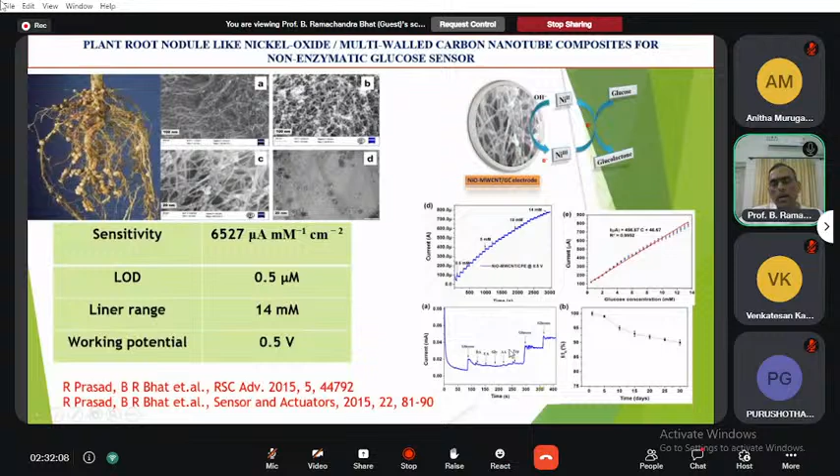At 0.5 micromoles, the linear range is around 14 millimoles, with a working potential of 0.5 volts. You can see the selectivity graph, where glucose is tested along with other possible materials normally found in the blood, and it gives a very good response only for glucose - it is highly selective. The glucose concentration graph shows an R-squared value of 0.99, which shows this is highly linear and a better material. It is published in RSC Advances and Sensors and Actuators.

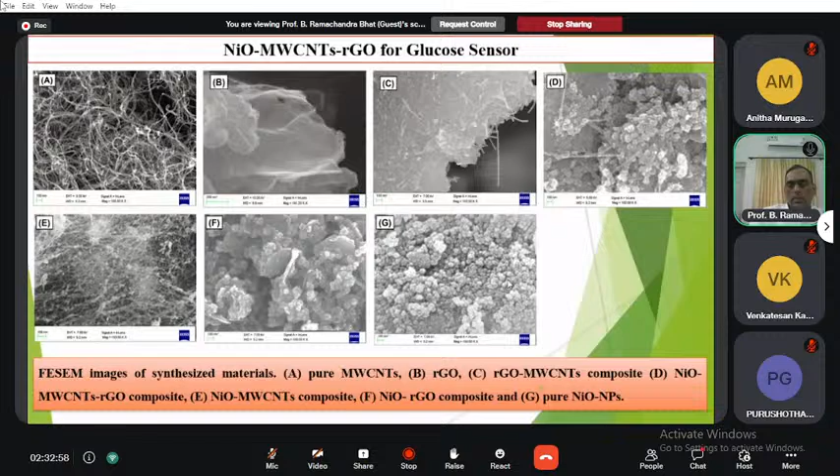So these are some images of the material, that is nickel oxide and multi-wall carbon nanotube, and we have added graphene oxide also to this. This material is used again for glucose sensors, and it shows a very good sensitivity of 4244, a linear range of 19 millimole, an LOD of 0.92, and applied potential of 0.55 volt.

Then we have taken quantum dots for spectrophotometric estimation of glucose. You can see how the quantum dots help in sensing the glucose. These are amino functionalized graphene quantum dots. When this reacts with glucose, the quantum dot pieces are joined through this, and thus you can see the glow here, which is the photoluminescence emission observed.

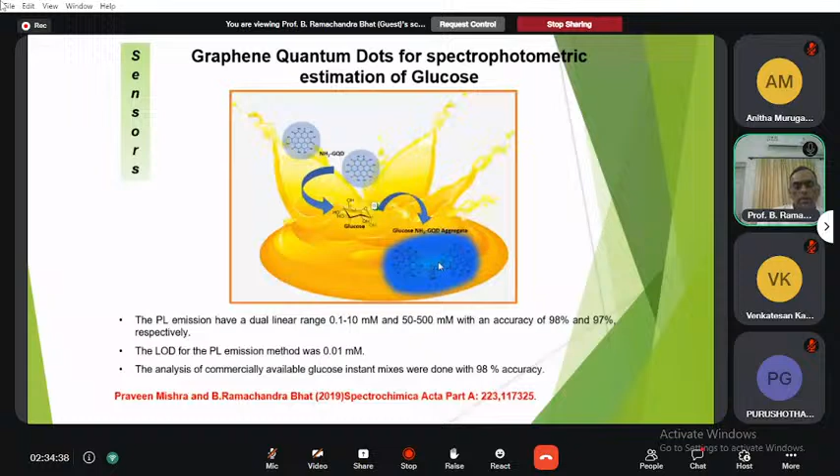This has a dual linear range of 0.1 to 10 millimoles and 50 to 500 millimoles, with an accuracy of 98% and 97%. The limit of detection for this PL emission method was 0.01 millimole, and analysis of commercially available glucose in an instant mixture was done with 98% accuracy. It has been published in Spectrochimica.

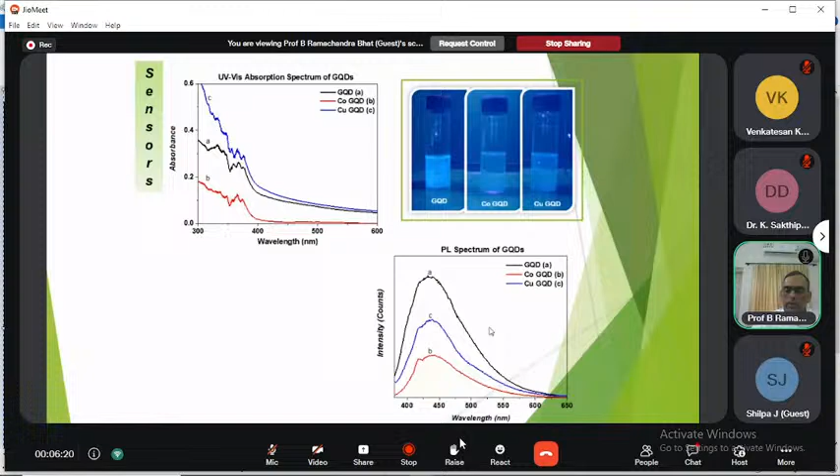Now the material is used as a sensor here. This is the quantum dots, and when it reacts with cobalt or copper, it loses its PL. This graph shows the PL intensity for plain graphene quantum dots, and this intensity for copper as well as cobalt.

So the metal ion interacts with the quantum dots through an oxo linkage with the dangling oxygen at the edge of the graphene quantum dots, and the PL is quenched. This quenching is observed with cobalt and copper, which interact with the graphene quantum dots, because of long range conjugation obtained around the metal ions which relax the excitonic barrier. That is why PL quenching is observed.

So this PL quenching is well utilized in fast qualitative sensing of metal ions like cobalt and copper present in aqueous media.

We have used the same graphene quantum dots to measure calcium also. You know the role of calcium for the human body is to circulate the blood, move the muscles, release the hormones, neural signal transport, and formation of teeth and bone.

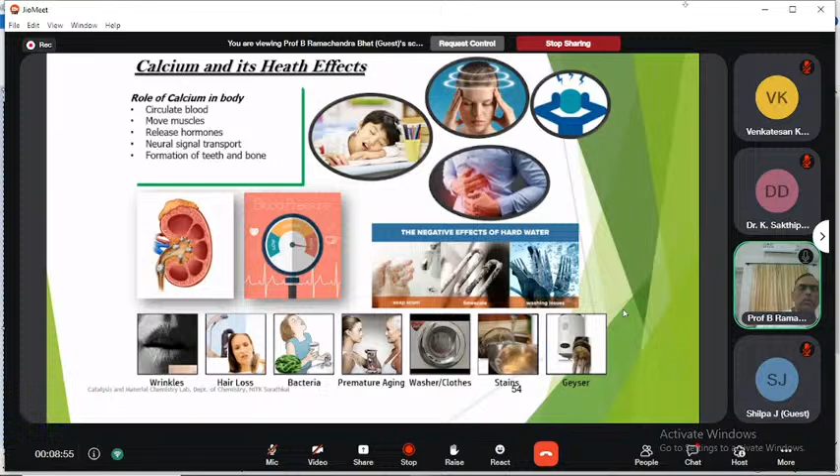The graphene quantum dots is also used, as I said, for the spectrophotometric estimation of calcium. Graphene oxide is taken and autoclaved, and you get a GQD. This GQD shows photoluminescence, but when you put it into water, this GQD loses its photoluminescence. You can see here there is no glow.

Why is this so? Because the calcium present in water interacts with the GQD core, and an agglomeration or aggregation takes place, with this linkage bridging the two graphene quantum dots. This interaction leads to the quenching of the PL in the GQD.

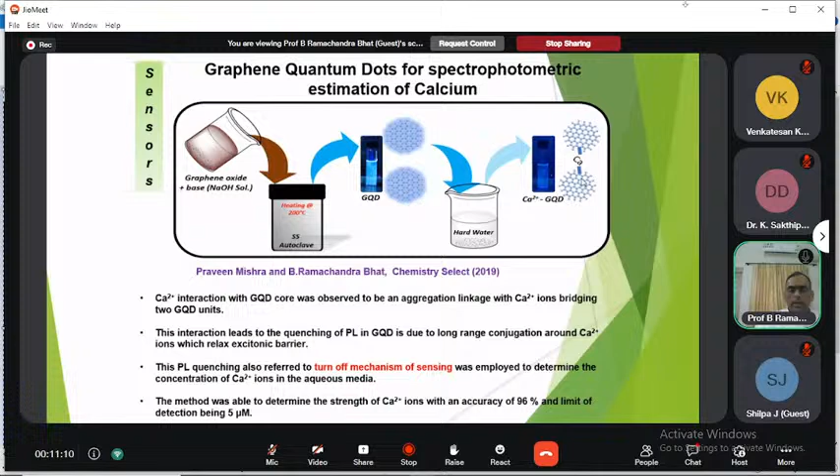Why does it quench? Because of the long range conjugation around the calcium ions, which relaxes the excitonic barrier. So the PL quenching refers to the turn-off mechanism of sensing, and it's employed to determine the concentration of calcium ions. The method was able to determine the strength of calcium ions with an accuracy of 96%, and the limit of detection is 5 micromolar. This is an extension of the same work, where quenching of PL is due to relaxation of the excitonic barrier, used in the present study.

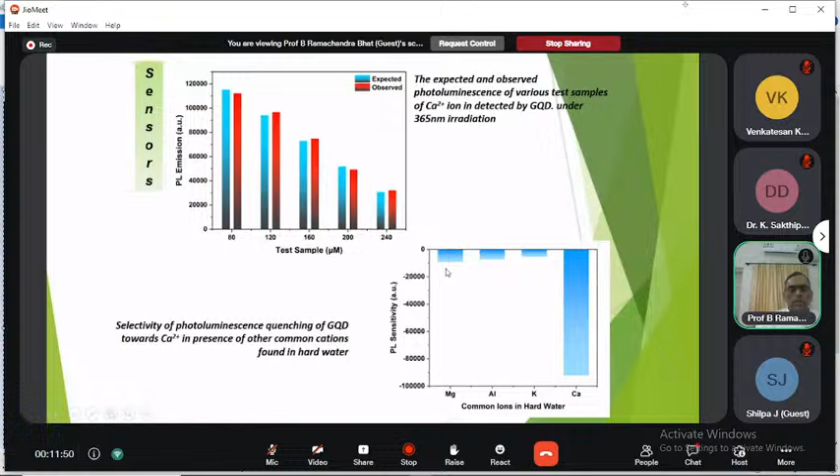To compare, we took another study showing what is expected and what is obtained under the same graphene quantum dots experiment, and you can see how sensitive it is. The selectivity of this material, compared with other materials, shows it is sensitive only to calcium. The graphene quantum dots are also used for sensing.

We have used this for sensing oxalic acid. Oxalic acid present in the body forms calcium oxalate, and this calcium oxalate is nothing but kidney stone. So one has to monitor the concentration of oxalic acid in the body.

This is the amino functionalized graphene quantum dots, and the oxalic acid approaches and forms a bond with this oxygen, and because of the oxalic acid, more oxygen becomes available here. What happens is reduction of a free acid group takes place. This is the graphene quantum dots, and oxalic acid approaches and forms a bond with the amino functionalized group.

The binding of oxalic acid to this amino group on the NH2-GQD provides an excess oxygen environment. These oxygen groups can undergo reduction, and the bound oxalic acid provides excess oxygen, which is rich on the terminal, thereby giving the reduction current. Thus the reduction is possible here.

The beauty here is that the response time is less than 2 seconds. And for selectivity, you can see the activity with oxalic acid compared to uric acid or glucose, which are normally present in the blood or urine. It gives a response to the oxalic acid only.

Now we have prepared metal oxides as glucose sensors. In this case, titanium oxide is prepared and doped with vanadium, nickel, or cobalt, and it's used as a glucose sensor.

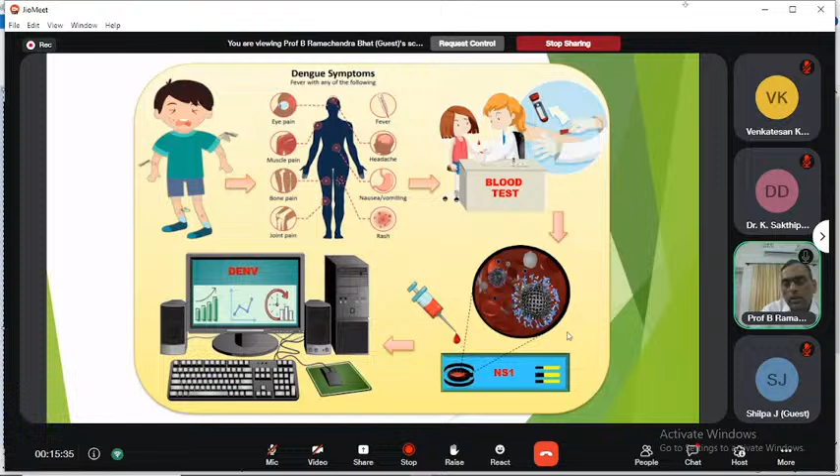Coming to another sensor, we are preparing a dengue biosensor. The material used is not yet published, and we are at the verge of completing the reactions. You know how dangerous dengue is, and we have come up with a sensor for the non-structural protein NS1 as a biosensor, working as an electrochemical sensor.

Now you know that you have a glassy carbon electrode, and the material is pasted on this and drop casted, and it's electroactive material, and anti-NS1 is present in that. And dengue NS1, when it reacts, it gives a signal, and it goes to the transducer and then amplifier, and the dengue can be detected.

Now you can see that, as I said, Richard Feynman said in 1959 at Caltech that there is plenty of room at the bottom. So nanotechnology is likely to be particularly important in the developing world because it involves little labor, land, and maintenance. It is highly productive and inexpensive. It requires a modest amount of material and energy.

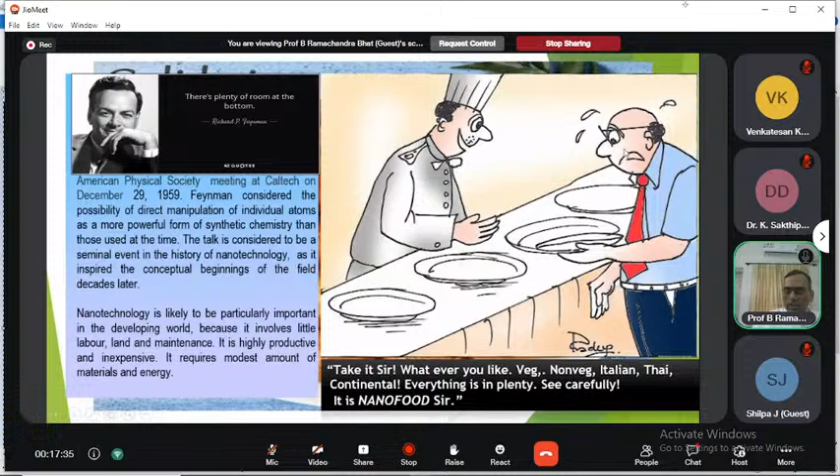And this is a small achievement from my side. I work on materials, coordination compounds and nanometal oxides as NLO material and catalytic material for organic synthesis. Coming to the nanomaterials, we work on carbon nanomaterials and graphene and metal oxide composites for applications like high yield synthesis, hydrogen storage, solar cells, supercapacitors, catalyst, substrate, and biosensors. And on the other side, we work on coordination compounds as catalysts, antimicrobial activities, non-linear optical materials, and this is the publications and the student, the PhD guidance.

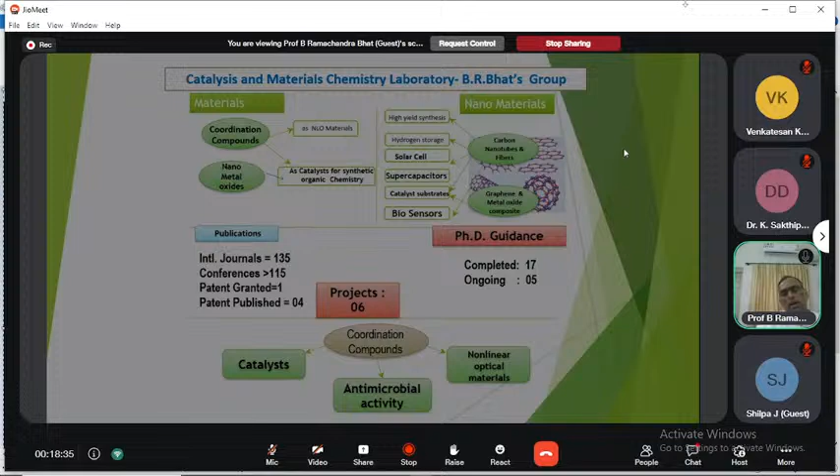And all this happened because of the hard work of my students, around 22 students. They work day and night, and because of their hard work, today we are enjoying this research.